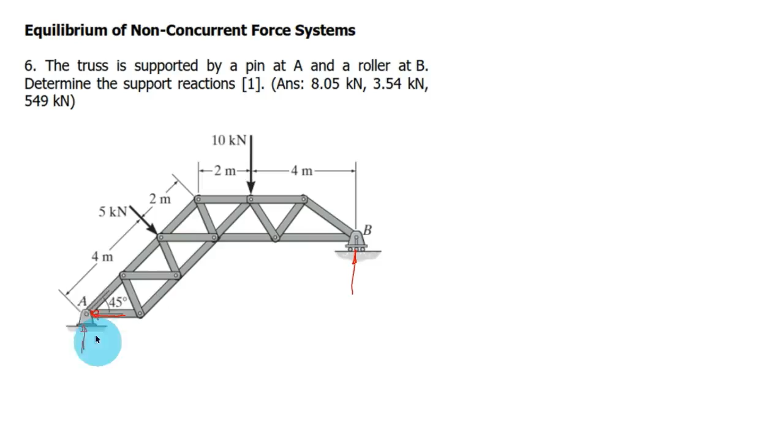Okay, so let us denote this as RA or AY, and the horizontal force or reaction is AX. So actually, yung resultant reaction, nandito siya. So we are just solving for the components, yung AX saka yung AY. Okay, so for the roller, isa lang yung reaction dito. Wala siyang horizontal reaction, kahit na may load tayo dito na down to the right. So let us denote this as RB or reaction at the roller.

So the required, pwede nating isulat yung AX, AY, and RB. So it's up to you anong gusto nyo na variable na gamitin. Okay, so solution. The next step after drawing the free body diagram is to apply the conditions of equilibrium. So, tatlo lang naman yun: yung summation of forces vertical, summation of forces horizontal, and the summation of moment. So, yung axis natin dito, kahit hindi na natin ilagay dito yung x at y, pwedeng ilagay nyo na lang maliit na axis, yung x saka yung y.

Okay, so start with taking summation of moment. So, kapag reaction, automatic moment ang unang-unang gagamitin natin na condition of equilibrium. And then, yung point of moment, doon lagi sa may madaming forces na involved. So, dito sa figure natin, sa A tayo mag-moment. Okay, so take summation of moment at point A. So, this is the solution to solve RB.

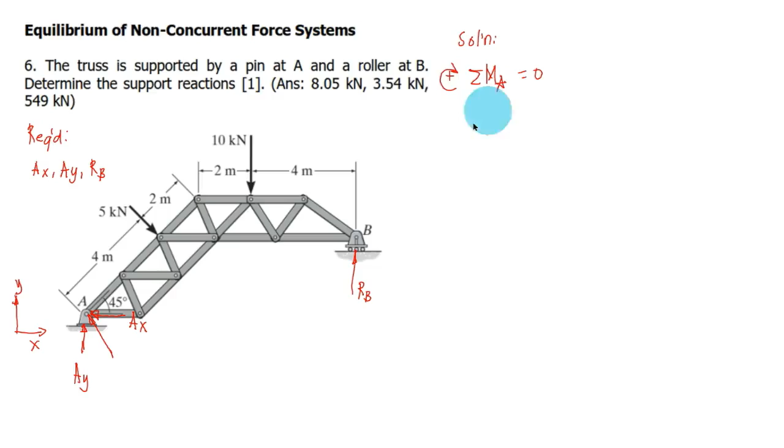Okay, so solution for RB, we take summation of moment at point A, assuming clockwise positive. Okay, so that is equal to 0. Then, identify natin yung mga moment arm tsaka yung forces na involved. So, unang-una, meron tayong 10 kilonewton. So, ang moment arm niyan, mula dito sa kanyang point of application, ay yung 2 meters plus yung length dito sa A hanggang dito. So, kailangan natin i-solve itong haba nito.

So, by referring dito sa triangle natin na mapa-form. Okay, so may triangle tayo dito. So, ito yung 6, then ito yung 45. So, kung i-solve natin itong side na to, yan ay 6 cosine of 45 degrees. So, therefore, ang length nito, yung moment arm ng ating 10 kilonewton na force, yan ay simply 6 cosine 45 plus 2. Okay, so ito yung ating 6 cosine 45.

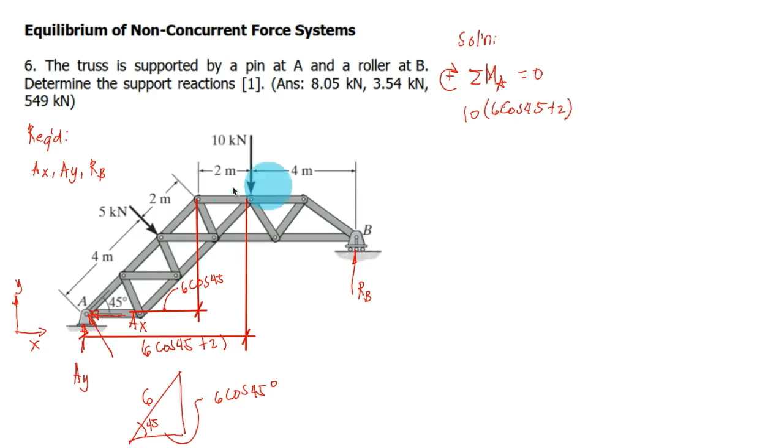So, pwede na tayo mag-moment. So, 10 multiplied by 6 times cosine 45 plus 2. Okay, so that is clockwise, so positive. Plus yung ating 5 multiplied by yung kanyang moment arm, so 4. Then, ang direction ng moment ay clockwise, so plus tayo. So, 5 times 4.

And then, next, yung RB. So, ang moment arm niya ay 6 cosine 45 plus 2, then plus 4. Okay, so yun yung kanyang moment arm. Then, yung direction, counterclockwise, so minus. So, RB multiplied by 4 plus 6 cosine 45 plus 2 equal to 0. So, masasolve natin dito yung RB na 8.05. This is kilonewton. So, kung gusto natin mag-unit analysis, okay lang din.

So, yung 10 ay kilonewton. Then, itong quantity na to, meter. Then, ito kilonewton, then ito meter. Then, ito ay naka-meter. So, common yung meter. Pwede natin i-divide both sides ng meter, so cancel out yung meter. And then, ang matitirang units ay kilonewton. So, now we have RB.

The next solution, to solve AX and AY, we just simply take summation of forces horizontal or summation of forces along X. So, let us solve first for AX. So, let us take summation of forces along X equal to 0, assuming to the right positive. Okay, so we have yung component ng 5 kilonewton. Okay, so this is equal to 5 multiplied by cosine of 45 degrees.

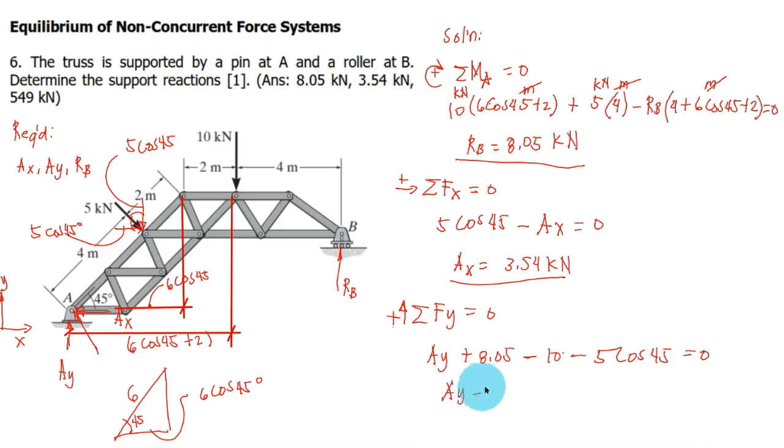Okay, and then last, yung component ng 5 kilonewton, yung vertical component. So minus 5 cosine 45 degrees equal to 0. So our Ay here is simply equal to 5.49. So 5.49

kilonewton. So for our next problem, the member shown is pin connected at A and rests against a smooth support at B. Determine the horizontal and vertical components of reaction at the pin A. So the unknowns here are the reactions at pin A. So meron tayong applied load na triangular.

So as usual, kapag meron tayong triangular load, kailangan natin isolve yung kanyang equivalent load, which is equal to 1/2 yung intensity multiplied by yung length. So ang length nito ay 1.5, tapos yung kanyang intensity dito sa dulo ay 80. So that is equal to 60 Newton. Then similarly, yung kanyang location. So mula dun sa tip, yan ay 2/3 multiplied ng length.

Then next step, draw yung FBD. So kung meron tayong applied load na downward, meron tayong vertical na reaction. Okay, and then meron tayong applied moment. So this is clockwise moment. So ang tendency nito, meron tayong horizontal reaction na to the right. Kung di kayo sure dun sa direction, pwede kayo mag-assume. Malalaman nyo naman sa sagot kung tama or mali yung direction na in-assume natin.

And then dun sa smooth support, since smooth yan, isa lang yung reaction, yung normal lang dun sa given na member. So let us denote that reaction as NB. Okay, and then yung kanyang angle of inclination, since ito ay naka 30 degrees, therefore yung angle of inclination nito versus dun sa vertical, 30 din. Then kailangan natin isolve yung kanyang mga components din. Mamaya, gagamitin natin to sa summation of forces vertical, saka sa horizontal. So itong side na to, NB cosine 30, tapos yung horizontal, NB sin 30.

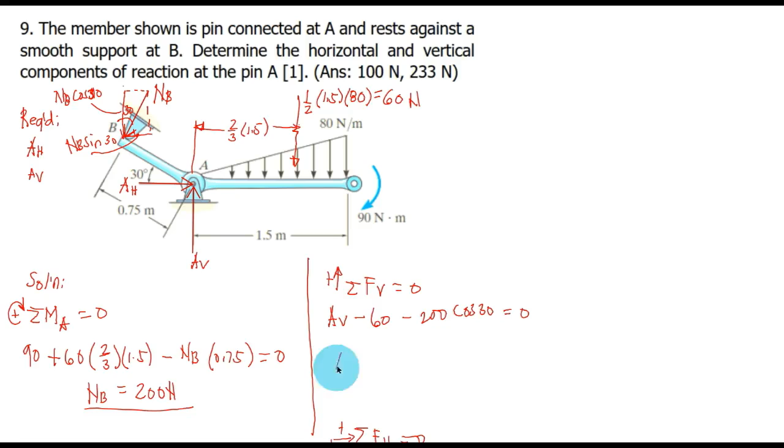Then next, meron tayong downward forces na 60, tsaka yung component nito. So minus 60, then minus NB. NB ay 200. So 200 cosine of 30 degrees equal to 0. So yung A sub V ay equal to 233.21.

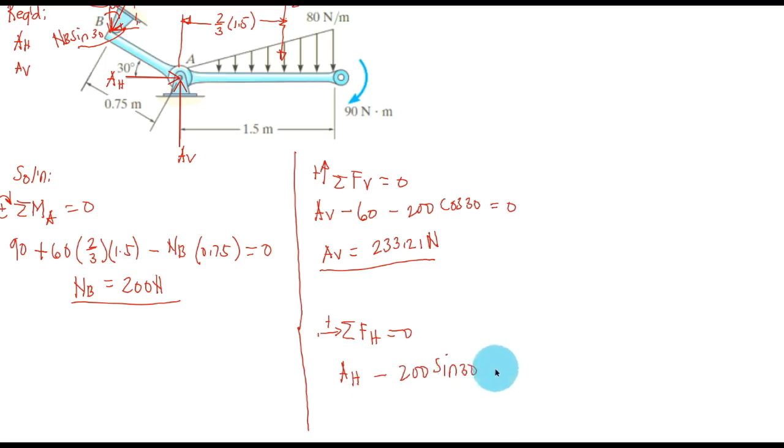The next unknown, we have A sub H. Okay, so of course to solve that, we need to take summation of forces horizontal. Then assume direction. Dito, assume natin to the right positive. So A sub H, then yung horizontal component ng N sub B, N sub B sin 30. And then yung N sub B, 200. So minus 200 sin of 30 degrees equal to 0. So that is equal to 100 Newton. So that's all for this video.